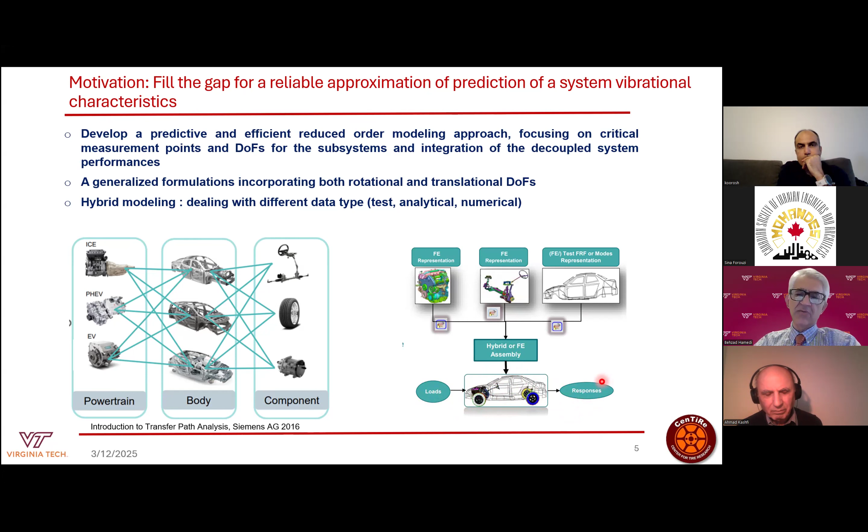Based on this linear approach, if we apply the load and know the receptance function for the system, we can find the response of the system using a simple linear equation: x equals h times f.

Another key application for this method is the receptance coupling method using frequency-based substructuring. That is a main focus for this research, the target cascading.

In the earliest stage of development, you can see this V profile, a common profile used in industry, mostly for the automotive industry. We start with the vehicle level, then go to subsystem decomposition at the subsystem level, do the design, and then integrate the subsystems.

In this early phase of development, you sometimes need to decompose a subsystem from the system, focus on just one subsystem, assign some targets for that subsystem, and check the performance in the design process.

Sometimes you need to combine some subsystems and integrate them to find the overall vehicle performance at the system level. So this technique is quite applicable for the target cascading process and is actually an effective approach in terms of cost and time.

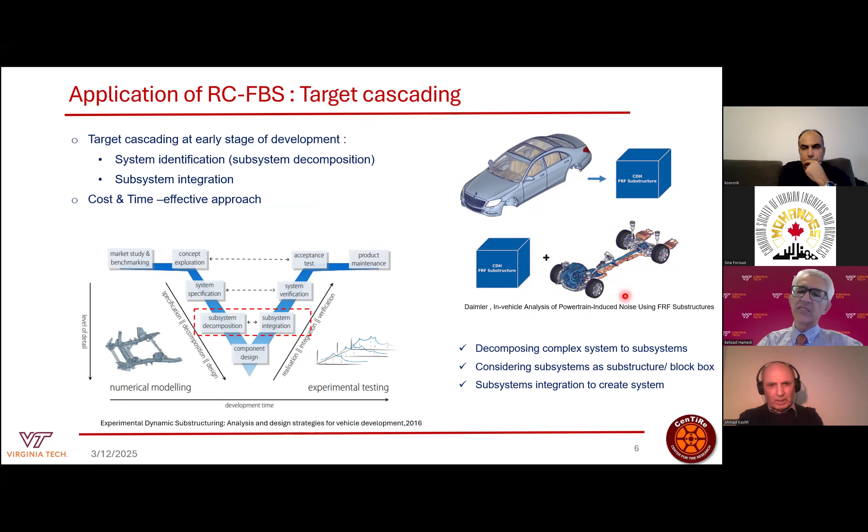We assume we can treat each as a black box, where the black box contains the DNA of the upper body, which is the receptance matrix, and similarly for the platform. We then integrate these two subsystems to find the overall vehicle response.

In structural dynamics and vibration analysis, complex systems can be analyzed by dividing them into subsystems, which we call substructures, because they are more manageable and easier to measure.

The dynamic substructuring technique breaks down into three main categories: the physical domain, the modal domain, and the frequency domain. The physical domain is based on the time domain, the modal domain is based on eigenvalue analysis, and the frequency domain, which is our focus, is based on the Fourier transform or FRF.

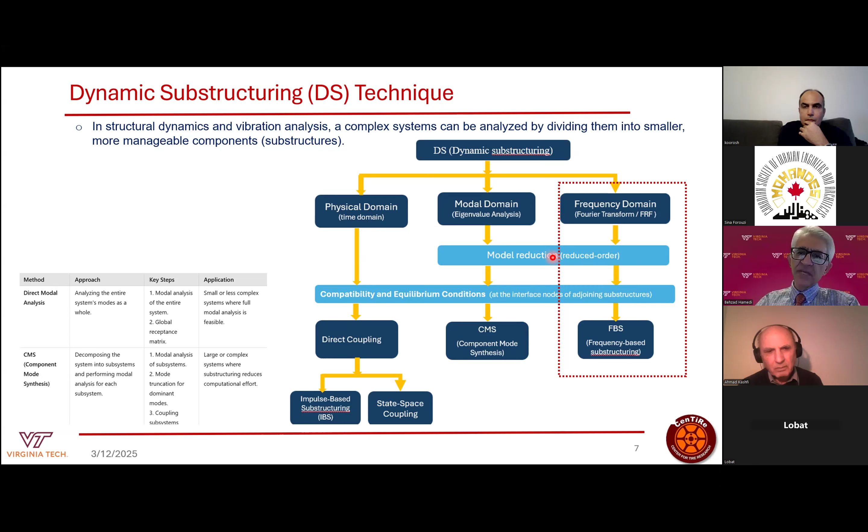We mostly focus on this part, the frequency-based substructuring method. So two of these methods are the modal and the frequency-based approaches. Both of these methods are model reduction techniques, based on model reduction.

It is a model reduction technique because it assumes that a system or substructure will be replaced by a limited number of mode shapes, which we call mode truncation.

Frequency-based substructuring, which is my focus here, actually replaces or represents subsystems by a number of points that carry the DNA of the subsystems—points of interest that can be internal or connection points between the substructures.

When we define the subsystems, we use the compatibility and equilibrium conditions at the interface points to find the governing equations for the whole system.

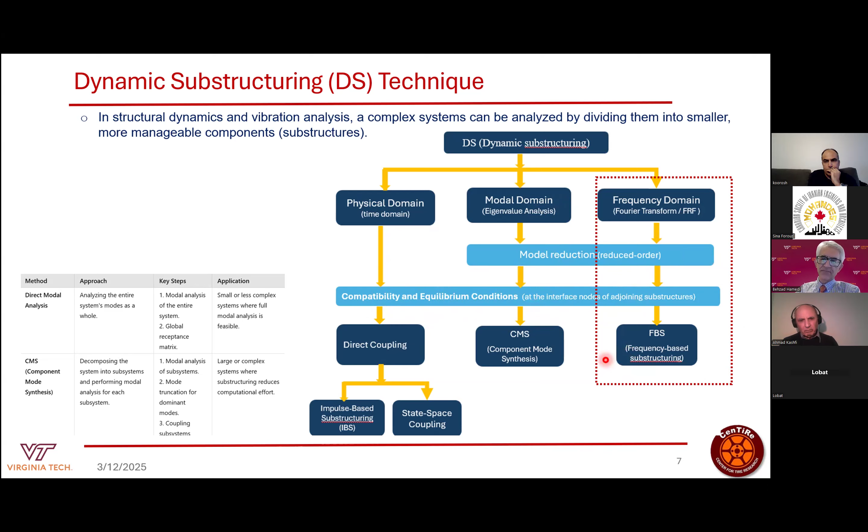In this matrix, I'm going to compare the modal technique and the frequency-based technique, both of which are used as approximation methods for predicting the system's vibrational performance and characteristics. The model reduction approach for the modal technique...

I also mentioned CMS, which is component mode synthesis, one of the main techniques for the modal approach used with substructures and subsystems, and it is actually based on mode truncation.

The frequency-based substructuring is actually based on condensing the system to a necessary or required frequency, FRFs, or the receptance function for the key interface and the internal points.

So our strategy here is replacing the subsystem by a number of limited points in the interior, as interior or as interface points.

Another assumption worth mentioning is that when we work with a model, we assume mode orthogonality in most cases. This mode orthogonality would be valid in the low and mid frequency range, when the damping effects is quite simple, and we can assume this is proportional damping or Rayleigh damping, or weak damping.

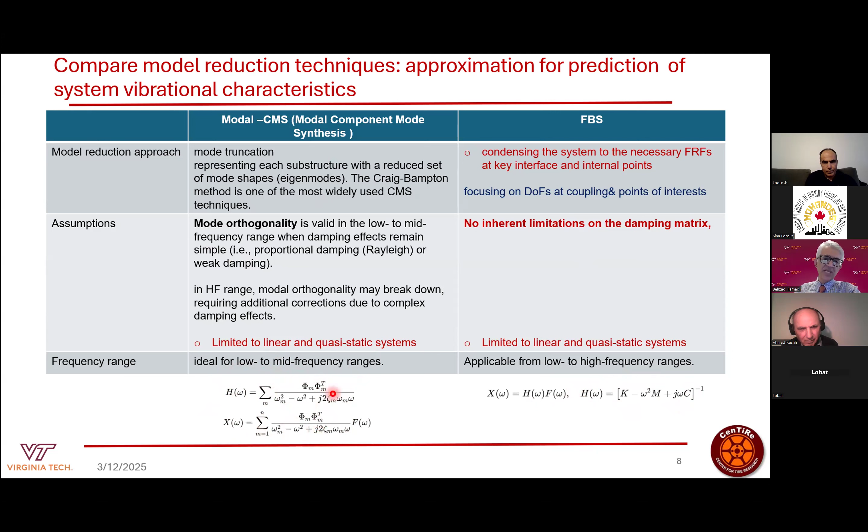In the modal technique, we calculate h from this equation, and this equation's assumption is based on the assumption of mode orthogonality. So the H, the receptance matrix, can be calculated from these equations, and we can talk about that later.

This slide shows the roadmap and flow chart of how we can determine the receptance of the assembly system or entire system based on the individual subsystems or substructures.

The first step is identifying the points of interest, which points are required to measure or focus on in the subsystems, and then define the partitioning strategy. How many subsystems you are going to focus on, two subsystems, or decompose the system to a higher level of subsystems. It actually depends on your availability for the subsystems, the information and data that you have.

The next point is focused on the concept of connection between the subsystems, because the subsystems are sometimes connected through single points, sometimes multi-points, and sometimes actual flexible points. So we have bushing, we have mounting in the connection points. We need to define which connections and how we can model this connection, by rigid assumption or with a flexible bush.

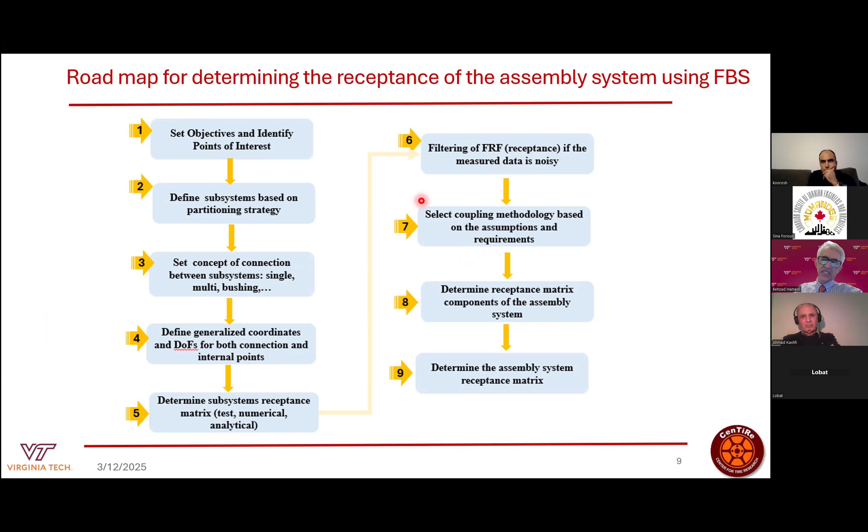And then finally, determining the receptance matrix and the component of the receptance matrix based on the algorithm governing the integration of the subsystems.

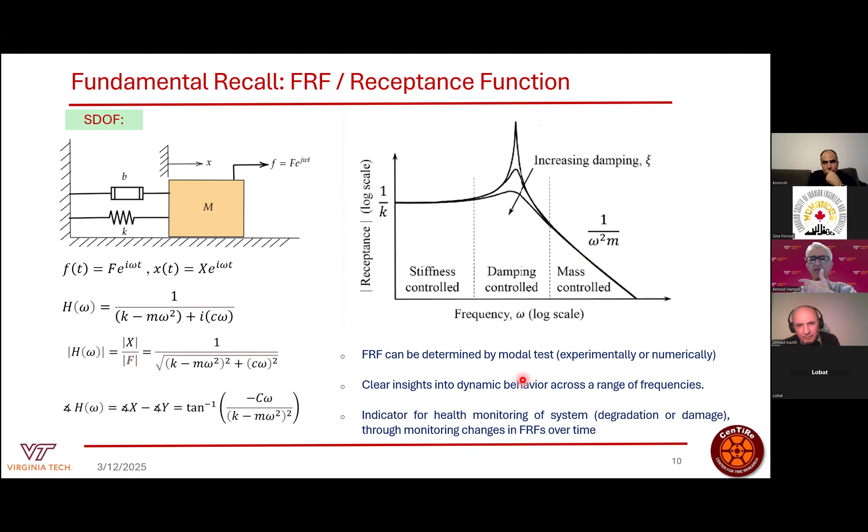A clear insight into the dynamic behavior across a range of frequencies for a system, used as an indicator for health monitoring of the system, to check that the system is under degradation or damage. And that's actually because it monitors the change in the FRF over time. So the change of the FRF over time is a good indicator to check that the system is healthy or not, for dynamic systems.

So this slide will illustrate how we can describe a 2 degree of freedom system based on the matrix of the receptance. If you have 2 points, X1 and X2, and we apply 2 excitations, F1 and F2, we can calculate X1 and X2 based on this matrix form. H11 means the component of the receptance obtained by exciting at point 1 with force F1 and measuring the displacement X1 at the same point. H12 means applying the force at point 2 and measuring the response at point X1.

In the case that we have the same number of excitations and measurements, F can be calculated from the inverse of H times X. But in some cases the number of excitations and measurements are not the same, so we can replace the inverse by the pseudo-inverse matrix. On the left side we have this equation for n degree of freedom systems, and we can write a similar equation for n degree of freedom systems.

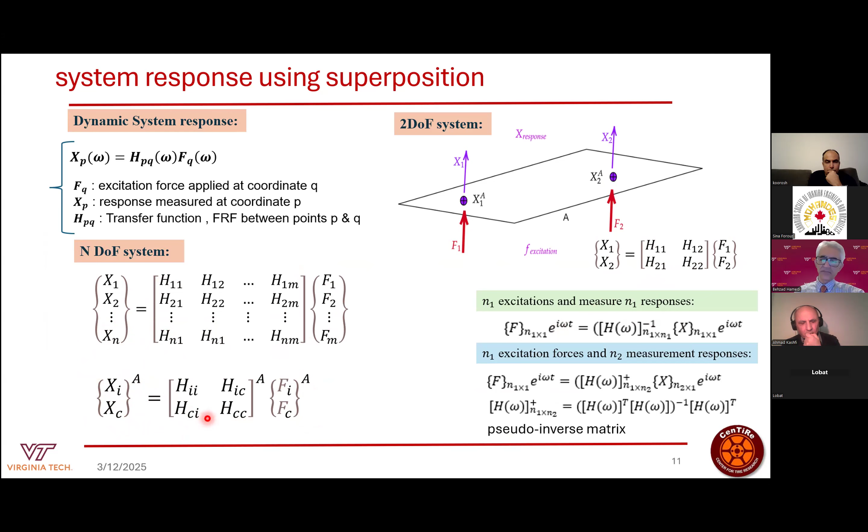As the simplest case, we start with a system AB that includes two subsystems, A and B. In general, each subsystem has its own internal degree of freedom that we want to measure or excite, and also the connection degree of freedom. In the decoupled condition, since we want to measure the subsystem individually, subsystem A's receptance matrix can be measured by test or numerical calculation. Similarly for B, if we have both the internal degree of freedom for A and the connection C for A, and B as the internal degree of freedom for B. The Z here is the dynamic stiffness, which is the inverse of the receptance matrix.

Let's consider this simple case where we only consider the connection degree of freedom, without any internal degree of freedom, focusing just on the connection points at the interface. In this condition, we ignore the internal degree of freedom for simplicity, and in the decoupled condition the governing equations for each subsystem would be like that. When we consider the boundary conditions as equilibrium and compatibility equations on these connection points, we can write the boundary condition equations like these.

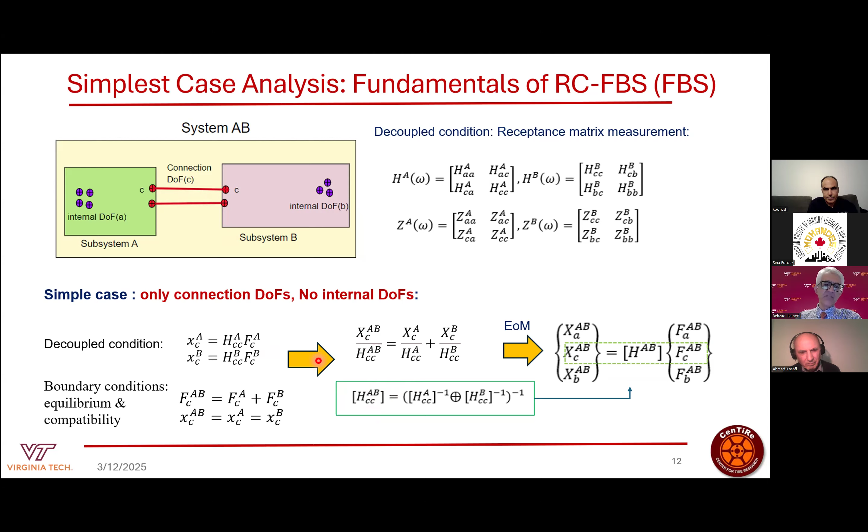So here the HCC can be a single data point or a matrix. If we have one connection, that will be only one single data point. But if we have multiple connections, like here, the HCC would be a matrix. So if you consider both internal and connection degrees of freedom, we have the AB system, still we have the two substructures assembled to create the AB system.

But consider more complex cases where we are interested also in points inside the substructures. Then this equation is not valid anymore, because this is only focused on the connection degree of freedom. We can prove that in this case we have a more complex form of equations that determine the receptance of the AB assembly based on the receptance components of the individual substructures. This methodology was first developed by Jetmundsen and published in 1988.

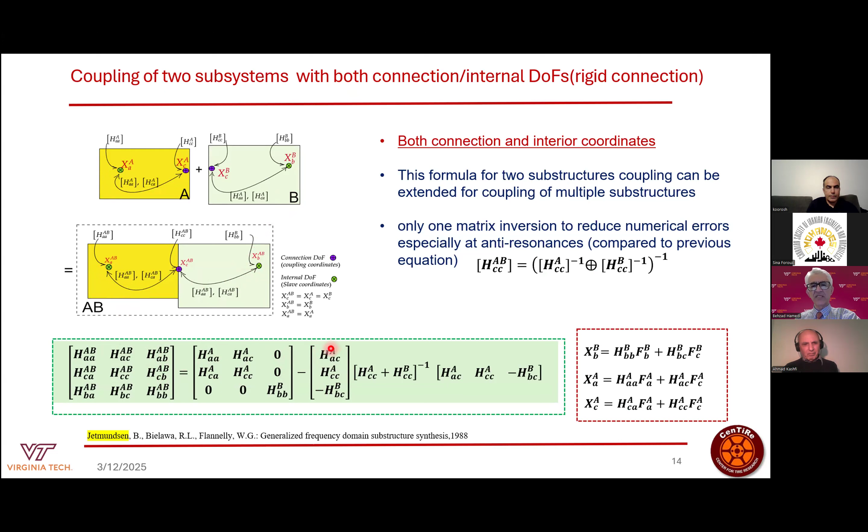So here I want to interpret the definition of the receptance component HAB physically. From this equation, let's extract HAB between points A and B. Point A here, and point B is an internal point located in substructure B. If we want to find this component from the other components, we set this to zero, and then manipulate this term and this term and this term. So we can reach this equation to find this component.

In this term, the middle term describes the receptance of the connection points. If there is no spring or flexible mounting at the connection points, this is the case.

And HAC is actually determined from individual measurement on substructure A, by excitation at point C and measuring at the internal point A, giving you HAC on substructure A. Similarly for HCB, B is the excitation point—we apply the force or excitation at point B and measure the response at the interior point. We apply the excitation force at the internal points of B and measure the displacement at the connection point. We can also prove that we have symmetry, so HCB is equal to HBC.

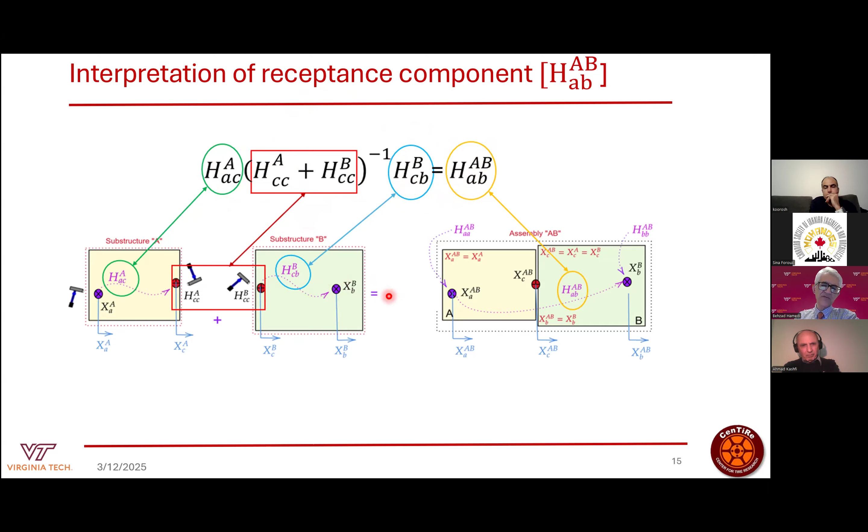In case we have flexible mounting at the connection points, the stiffness of this connection, or the flexibility, will appear here as the term K to the minus 1, K inverse, added to the receptance at these points, and this flexibility will be added.

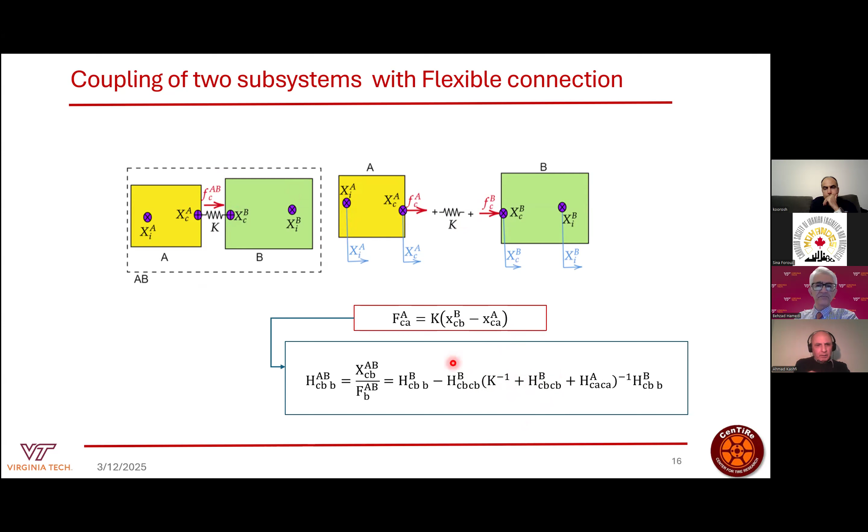As a simple case study, we consider a 2 degree of freedom dynamic system where both ends are fixed or constrained. In this case we can apply the substructuring method and decompose the system into two subsystems that are connected with a spring, so we have flexible connections.

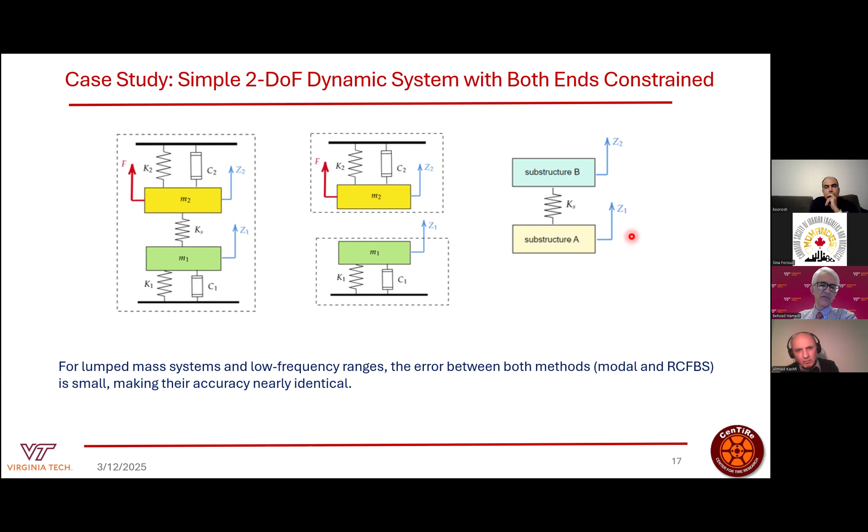For this simple case, based on lumped mass systems and with the assumption of low frequency range, there is a small error between the modal technique. If we solve this equation using modal analysis and frequency-based substructuring, meaning receptance coupling based on FBS, the error is quite small and we have good correlation—it's quite identical.

But we can show later that if the dynamic system is more complex, and the flexibility of the substructure is involved, this deviation or gap will be higher.

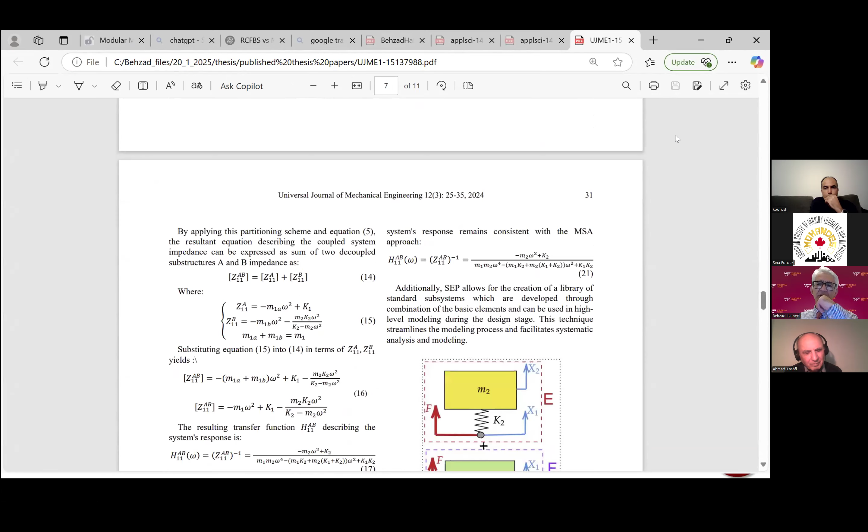I published these results and my research in these papers, and you can go for more details about what I discuss and the application in the automotive industry. The paper includes much more detail than what I just showed in one slide.

Another application for this methodology would be tire characterization using coupling and decoupling techniques based on this method. For instance, you want to calculate or measure the full vehicle receptance matrix, and based on that measure the response. You can do it based on the measurement of substructure A, the vehicle without tires, and substructure B, the tire itself. So we can focus on measuring the subsystems individually.

We can measure the tire because it's easier. We can measure the upper body, or have the data of the upper body without tires, and then use the receptance coupling technique, using this equation to find the coupled system receptance matrix based on the individual subsystems' receptance matrix.

And sometimes you're interested in measuring just one of the subsystems. For example, you have modal data from modal analysis performed on the full vehicle, so you have the receptance matrix. You also have the receptance matrix of the car without tires, and by this decoupling technique, B can be derived from the coupling of AB and minus A, because AB minus A gives the B properties.

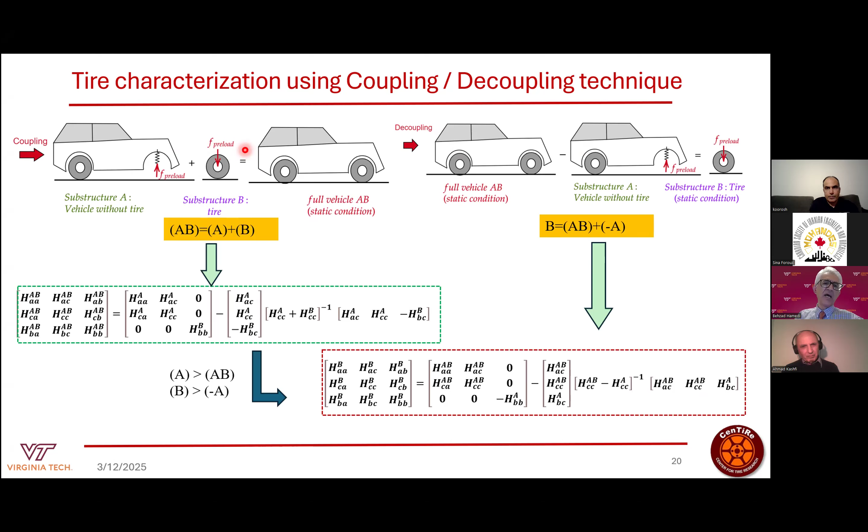This is more detail on what I mentioned, which steps we should take to apply the preload. For instance, we should consider dummy springs at the attachment points, apply forces, compress the springs, and use a belting mechanism to hold the body and the tires at the correct heights and correct preload conditions, and then measure the receptance matrix.

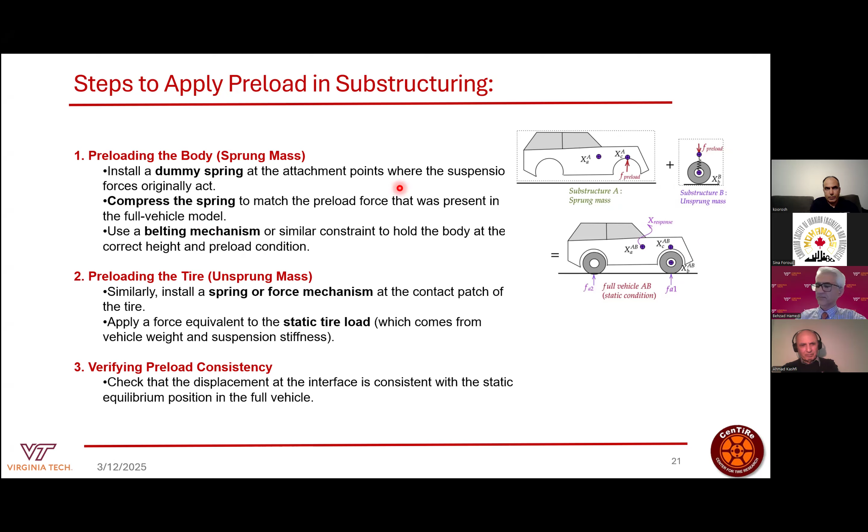Okay, so this is the slide describing the GRC-FBS method. This is the first generalized receptance coupling technique using the frequency-based substructuring that we call the Jetmundsen algorithm. Jetmundsen started with integration of the two substructures, and then extended this equation to cover multiple substructures.

So if we have an n number of substructures, the equation will be changed to this general form. In this equation, the H couple is the H of the assembly. The M matrix is introduced here as a Boolean mapping matrix, which connects the interface and the subsystems together, because when we have multiple substructures, we have multiple connection points.

So we need to define a Boolean, or a mapping matrix, that connects the interface and the subsystems together. So for deriving this equation, the graph theory was used.

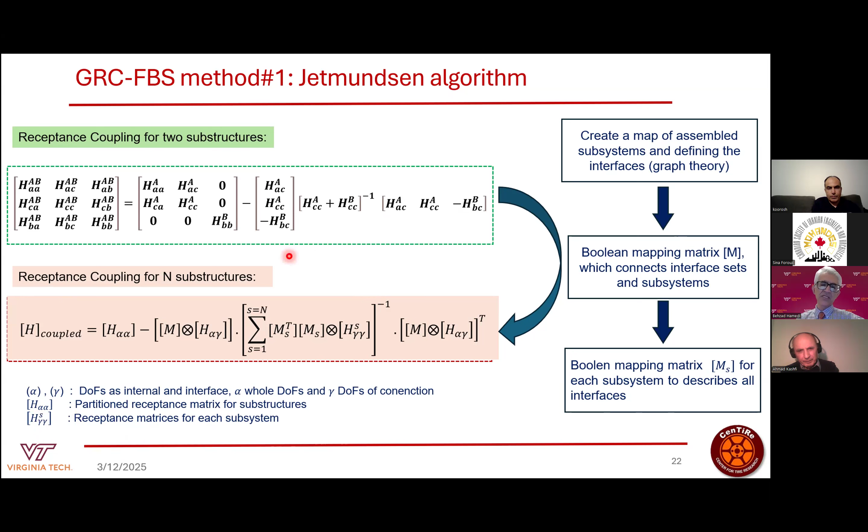So the second approach, the second methodology used as a generalized receptance coupling, is the LMFBS, that is based on the Lagrange multipliers approach.

I won't go into the detail of deriving the equations, but in this method we defined Lagrange multipliers to determine the internal forces at the connection points.

Based on applying the compatibility equations on the interfaces and defining the internal forces in the connection as a function of the Lagrange multipliers, and then inserting or plugging them into the equations of motion, we can reach this equation that gives you the H of the assembled or coupled system.

The H is in the condition of the disassembled or decoupled system, but this H covers all subsystems, and the B is the Boolean matrix that is derived from these compatibility equations. For these cases, there is a relation between the degree of freedom at the connections, so the B matrix can be calculated from the interface or connection between the degrees of freedom at the interfaces.

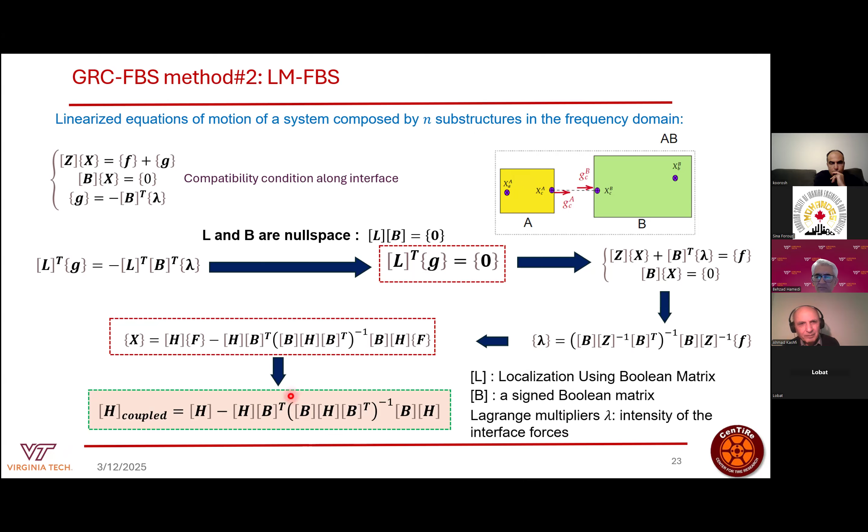So the next example is applying the reduced order model technique for electric motor noise study. If this is the Tesla Model S chassis, we can use this methodology to derive a reduced order model.

If we have an electric motor, we have the electric motor receptance matrix by testing, and then we have the mounting, the main mounting data, or the stiffness and the subframe data by test or FEA, and also this is the trim body. Actually the trim body is not here, but we assume the struts or dampers are connected to the trim body.

So we can define three substructures to represent the electric chassis system, substructures A, B, and C. This is the coupling graph between A, B, and C. A is the electric motor, and we consider internal degrees of freedom for the interior points, as well as the connection points for substructure A.

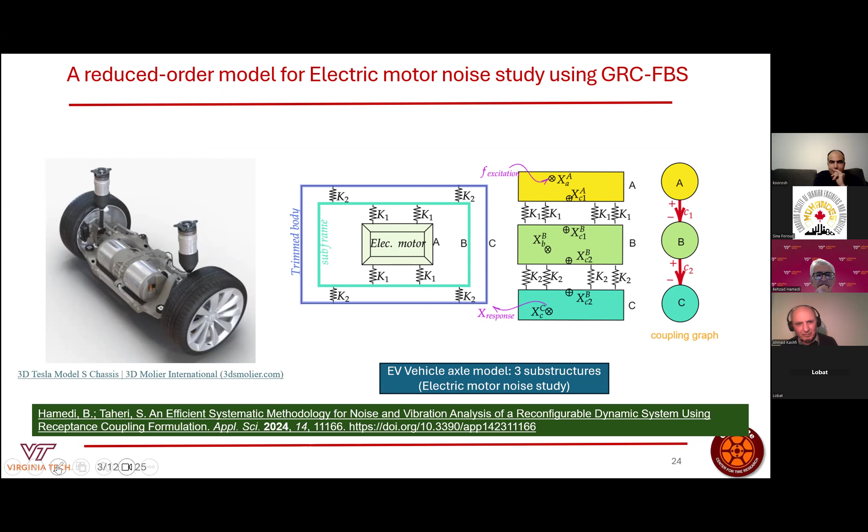In this paper, if you are interested, you can reach this equation - this is the very general formulation for this type of example. The alpha is the degree of freedom at the points of interest and connection points. We have two connection points, C1 and C2.

H alpha is the receptance matrix before coupling - it covers the three subsystems' receptance. You can see here, before coupling, H alpha is the receptance before coupling, and H alpha gamma is the receptance between alpha and gamma, where gamma is the connection points.

The M is the Boolean matrix that can be calculated based on the graph theory or graph schematic that describes the connection points and how the connection interfaces are between the interface and the substructures. Also, MA, MB and MC are for each substructure, derived from this matrix M. The first row is for A, second row for the B substructure, and third row is for the C substructure.

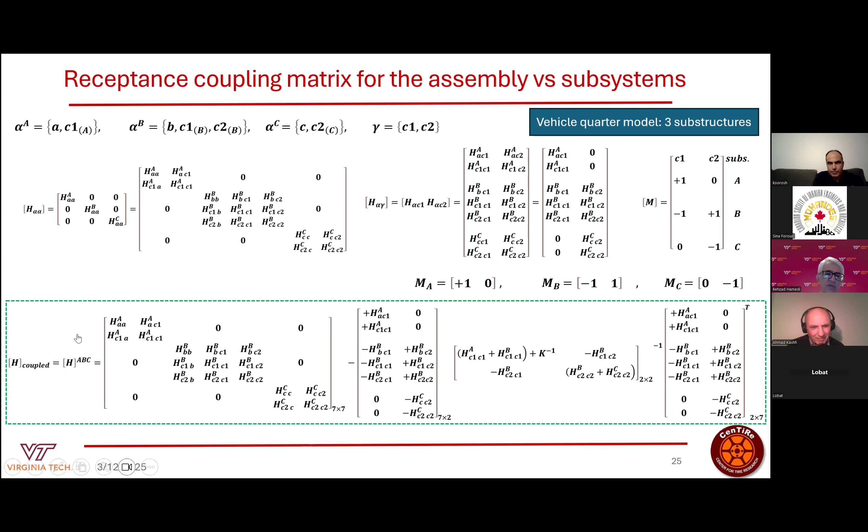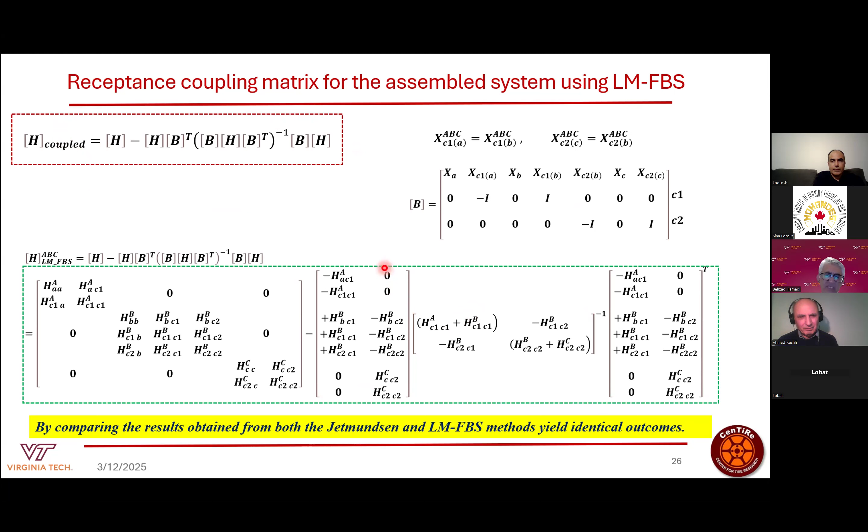Then we can couple them, and use this generalized formulation to derive the coupled receptance of the whole system. In this slide, I just use the second method - the Lagrange multipliers method using FBS, frequency-based substructuring. This also gives the same results if we use this methodology, so we can reach a similar response for the H matrix for the whole system.

Now I want to talk about extending generalized explicit terms. In my research, I was working to develop a more generalized form of the equations, integrating both translational and rotational degrees of freedom in a more explicit form, which would be quite effective for capturing the dynamics of flexible structures under complex loading situations.

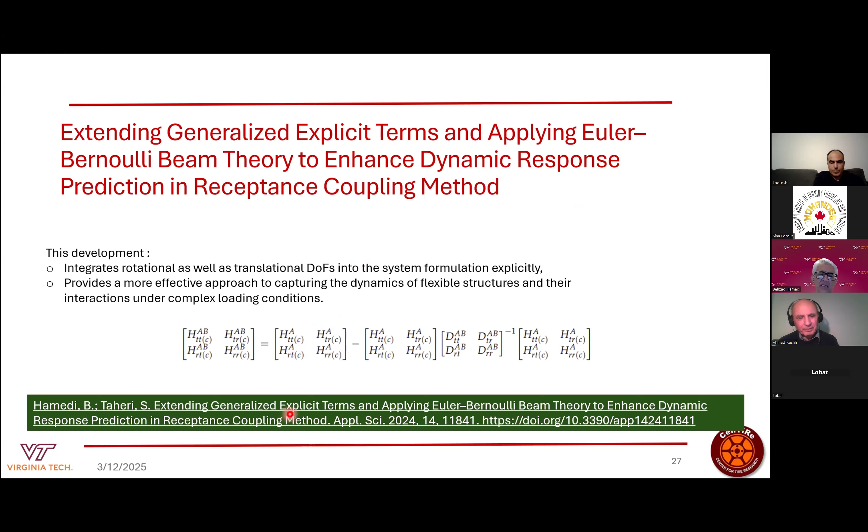I also used this for determining the receptance matrix for flexible bodies. I used the Euler-Bernoulli beam theory to determine the...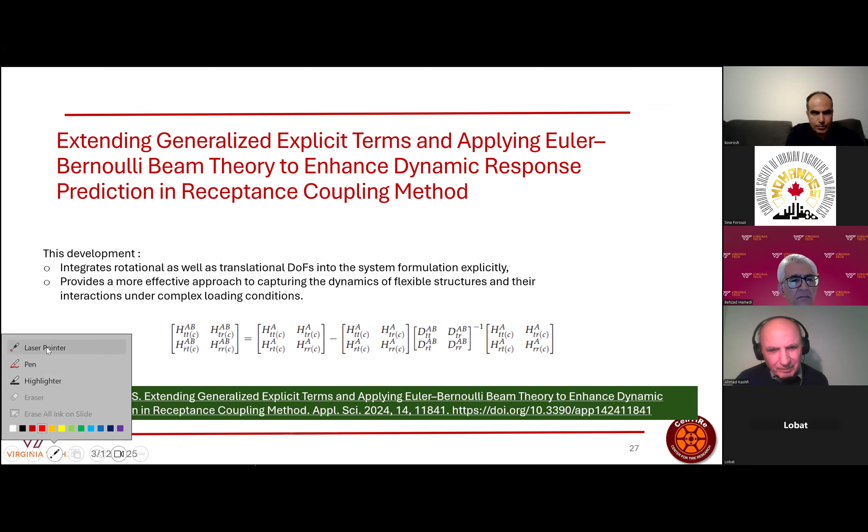This is the paper I published that includes all the details of how I developed these explicit terms, a more generalized form of the equations that govern this type of - in general, a generalized form of the receptance matrix. This is the detail of the equations I derived for this more general case.

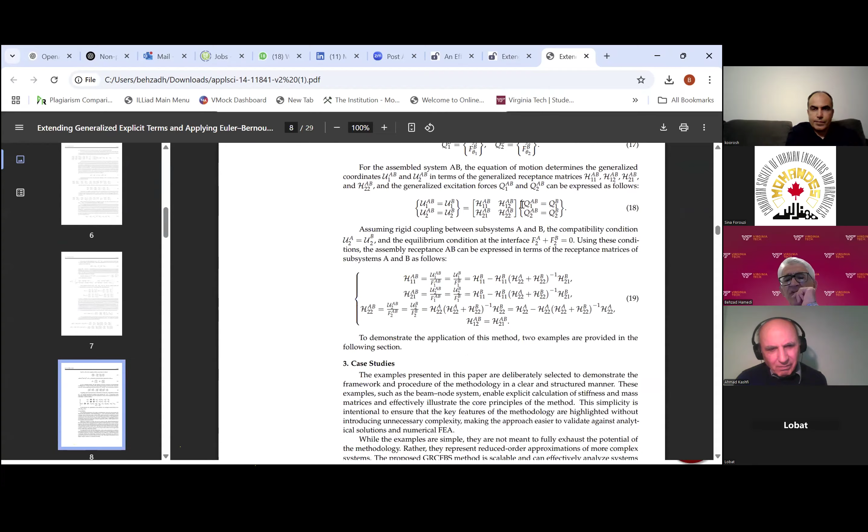This is the example or case study I used. As one case study, I just applied my methodology, considering simple cases based on two beam elements or two flexible bodies with beam elements. We have both rotation and translational degrees of freedom, and one of them is a cantilever beam, the other is a free beam.

We can calculate each substructure individually using the analytical equation based on Euler-Bernoulli theory - that was the reason I used the simpler case, so we can substitute each one as a substructure. This is substructure A, this is substructure B.

We have this connection with 2 degrees of freedom, both translational and rotational. When we find the assembled receptance matrix in different cases, this is a graph comparing the 3 graphs H11, H12, H22, based on different excitations. For example, H11 - you apply a force at point A, in the y1 direction, a simple force, and measure the y1 response, which gives you H11. H12 can be calculated by applying a moment or torque at this degree of freedom.

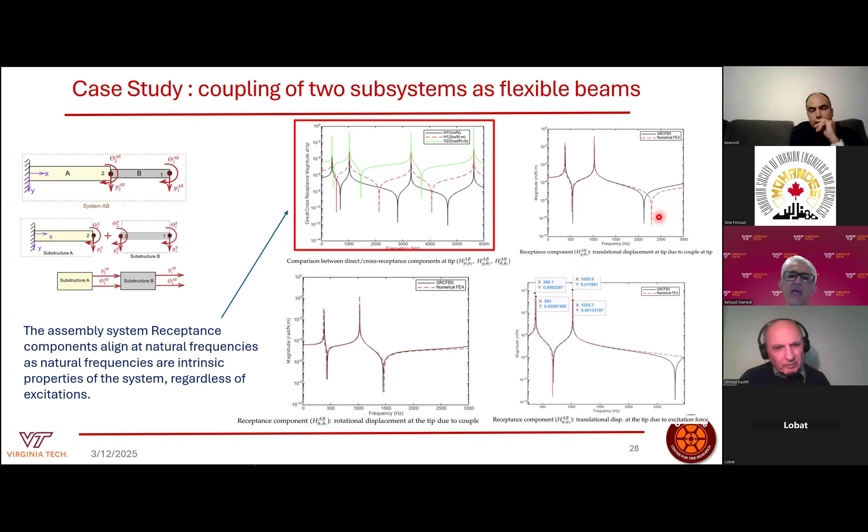And also for y1 y1, we apply the force at the tip and measure the displacement, and we reach good correlations. For the cross receptance components, we have a shift at higher frequency, a gap, which we can discuss later.

Another case study: we consider a flexible body with a rigid body, a rigid wheel. I wanted to know the dynamics of this system. In this case, we had a similar phenomenon - the natural frequencies are independent of the excitations. So we have H11, H12, H22. If we calculate at the system level, we reach the same peak and the same natural frequency, which of course we expected.

But when we compare, for example, H theta 2 on the assembly - this is the component of the receptance matrix in the assembly - comparing the magnitude between the two methodologies, GRC-FBS and numerical FEA, we have good correlation up to 2000 Hertz. But beyond that, we have a gap - a shift of the frequency, the peak of the natural frequency.

The trend is similar, but for another component, H Y2 Y2, we also have this shift at higher frequency beyond 2000 Hertz. So there is good agreement between the two methods in the first dominant mode, but beyond 2000 Hertz the rigid component's influence increases, affecting the accuracy.

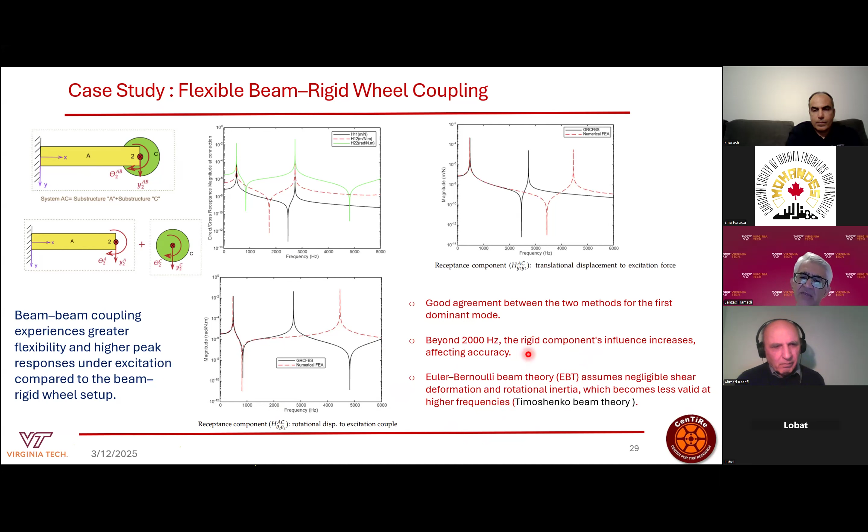We assume one source of this gap depends on our assumption. We use the Euler-Bernoulli beam theory, which assumes negligible shear deformation and ignores rotational inertia. This theory is less valid at higher frequencies, and if we want to be more accurate and include the effects of rotational inertia and shear deformation, we need to use the Timoshenko beam theory.

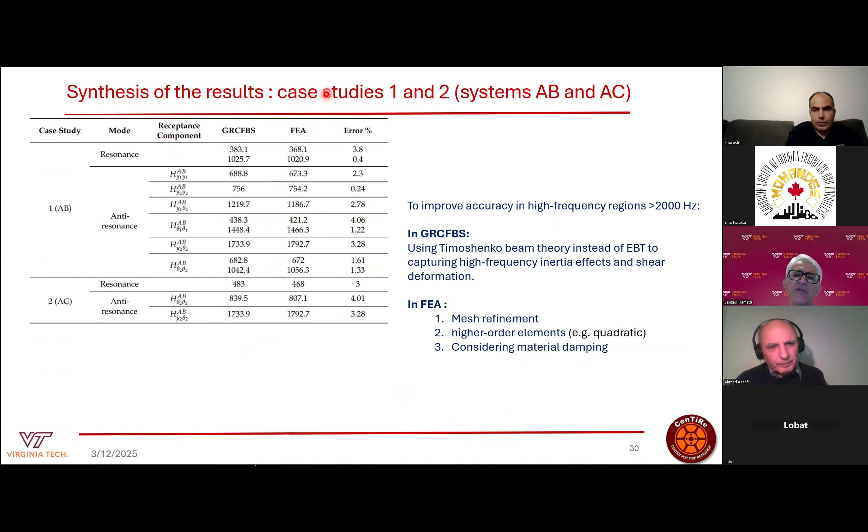Anyhow, in the case where I used the Euler beam theory and a simplified finite element modeling technique, we could reach a good correlation with an error of around 4%.

And if you want to improve that, it's possible. In the FEA, I can use more refined mesh, mesh refinement. We can apply higher order elements, quadratic instead of linear, and also consider material damping. I can also reach good correlation by using the Timoshenko beam theory instead of the Euler beam theory, to better capture high frequency inertia effects and shear deformations.

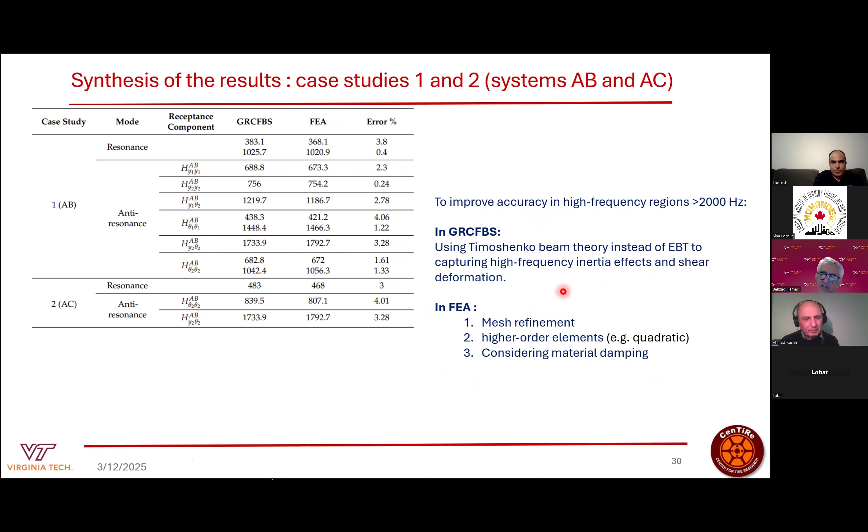This is another case study - the first time this technique was applied to derive the dynamics of the whole vehicle using the generalized receptance coupling FBS, the frequency-based substructuring technique. This is used for tire characteristics. Sometimes a supplier wants to evaluate different types of tires on vehicle vibrations, so in that case you have these substructures.

You can measure the substructure receptances, the body structures below the tires, and then integrate the different tire receptances to find the overall receptance matrix. The detail of that is actually represented in this paper.

So in this paper, this is the detail of how we can develop this theoretical framework and methodology for prediction of the tire characteristics. If you are interested, you can go to this paper and study it - it's actually published in the Journal of Vibration Engineering and Technology this year.

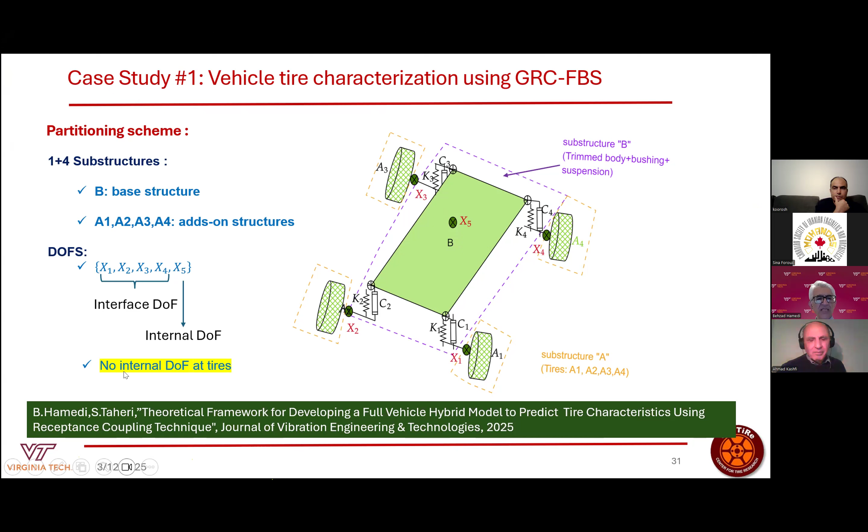So the degree of freedom: we have interface degree of freedom and also internal degree of freedom. X1, X2, X3 are the interface degrees of freedom that we call C. I also consider internal degree of freedom not on the tire, just on the body structure, as X5, because you are interested to measure the vibration at one point on the body structure, for example to record the noise on a microphone installed at that point. I assume there is no internal degree of freedom on the tire.

This is actually the coupling that I used for this problem. I use a multi-step scheme. In the first step, I assembled the governing equation for two substructures. I started to assemble A1, the first tire, the front left-hand tire, and assembled it with the body structure.

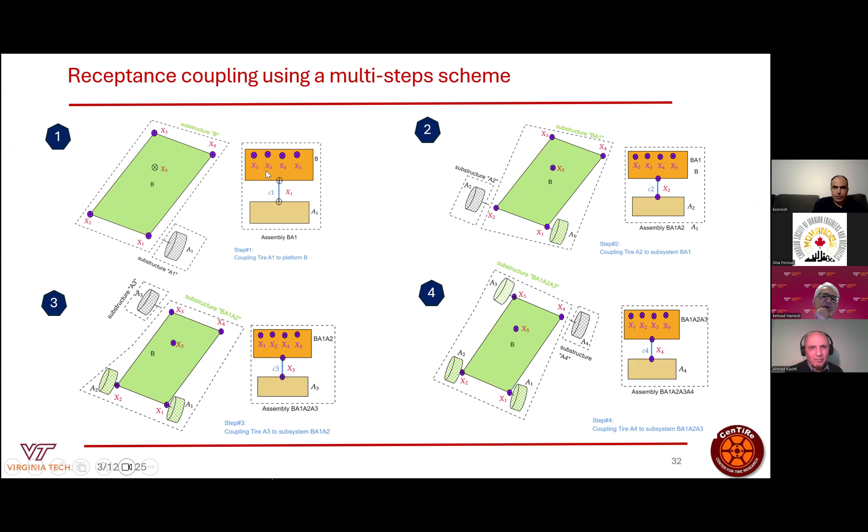This is the scheme of the substructures. Substructure B includes five degrees of freedom, or five general coordinates. We have x1, x2, x3, x4 as the connection degrees of freedom, and x5 is the interior degree of freedom.

When we assemble these two substructures, we can then consider them as one substructure and assemble it to the second tire. The third step is considering the previous step as one substructure and assembling it to tire A3. Then as a last step, we assemble substructure A4 to substructure B, A1, A2, A3.

So this is the process for deriving the equations. The beauty of this method is that the number of measurements needed to develop the full vehicle vibrational model is dramatically decreased. This is one of the beauties of this method.

For this case, we just need to measure only 5 elements on the disassembled substructures. For the body structure, we need to measure H11B, H21B, H31, H41, H51. We need to excite interface point 1, x1, and then measure the displacement at x1, x2, x3, x4 to calculate these receptance components for the body substructure.

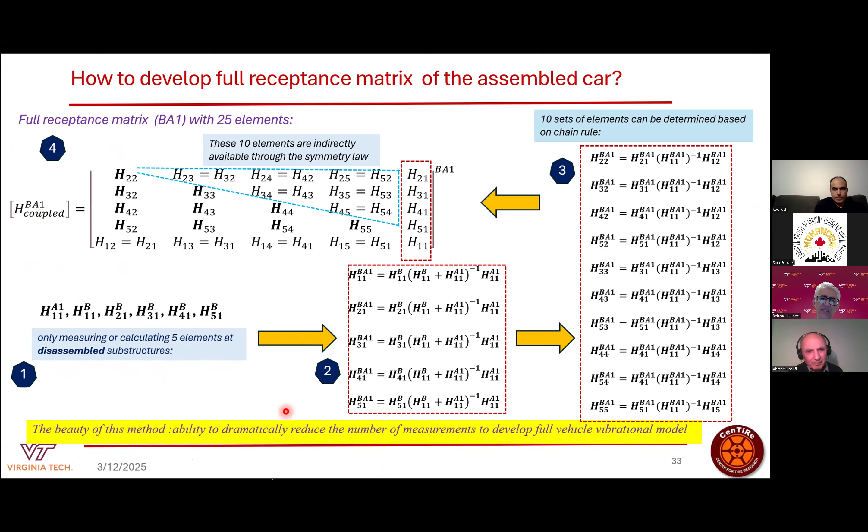So by measuring just 5 elements, you can determine the BA1 receptance matrix for the coupling of substructures B and A1, the first two substructures. Then we continue a similar approach for assembling BA1 with A2, then BA1A2 with A3, and so on to complete the full assembly of receptances for the car, starting from just 5 measurements. By just 5 measurements of receptance elements in the disassembled, dismounted condition, you are able to obtain the receptances of the whole vehicle using this approach.

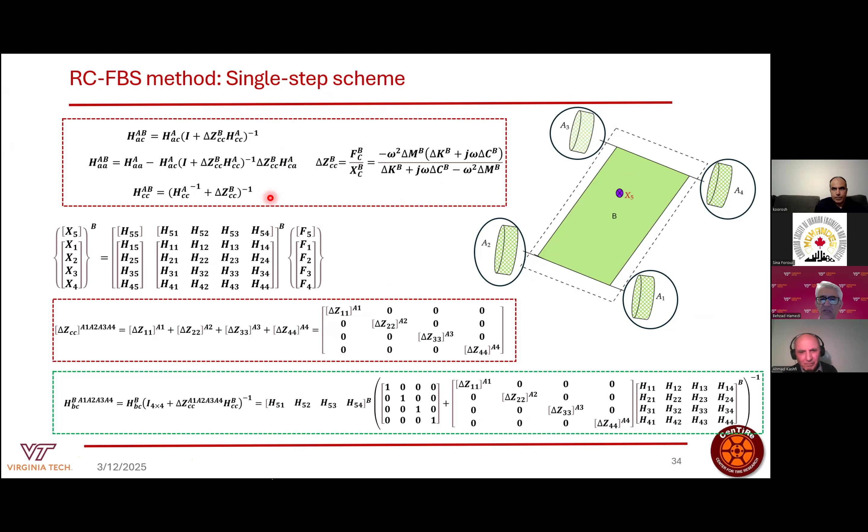So this is another concept or procedure - there is a possibility to assemble in one step, instead of multiple steps, the 4 tires to the body structure. So this is another scheme for the integrations.

I will not go through that because it takes a lot of time to discuss. But this is a similar case, with the only difference being that we consider the interior degree of freedom for tires. So we just consider A1, A2, A3, A4 as interior degree of freedom, or interior points on the tires. So each tire has 2 points of interest.

One is the connection, and the other is the internal point, because you need to measure something on the tires. You want to excite these points on the tire, the center of the points in the tire. So you need to assign this point - you need to consider this additional external point as interior.

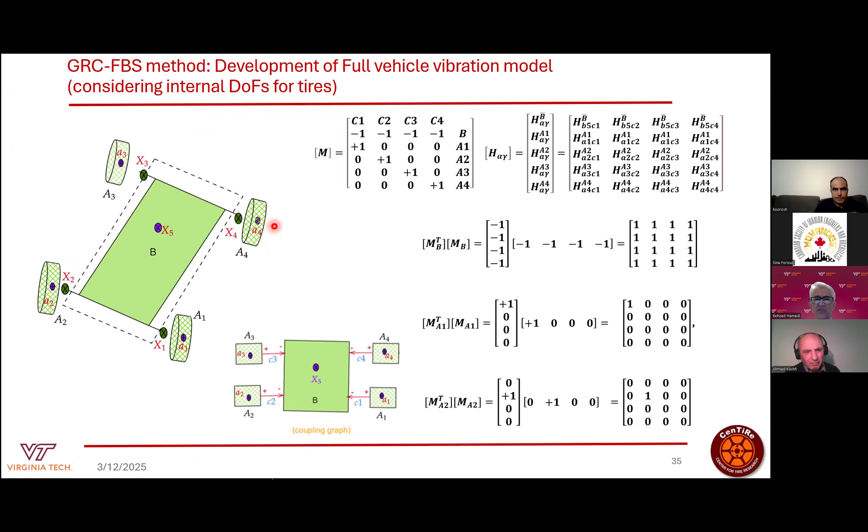So for this case I can use the general formulation, the GRC FBS, which is a more general case. We use the Boolean matrix. We develop the Boolean matrix - this actually gives you the relationship between the different substructures, because we have B, A1, A2, A3, A4 substructures, and shows how these substructures are coupled, having an interface or working together or in contact with each other through the interface.

So C1, C2, C3, C4 are the 4 connection areas. The M matrix components are -1, +1, and 0. It depends on the direction that you consider for the coupling, the connection - I mean the direction for the vibration. For example, here the vibration comes from the tires to the body structure, which is why we consider the direction for that.

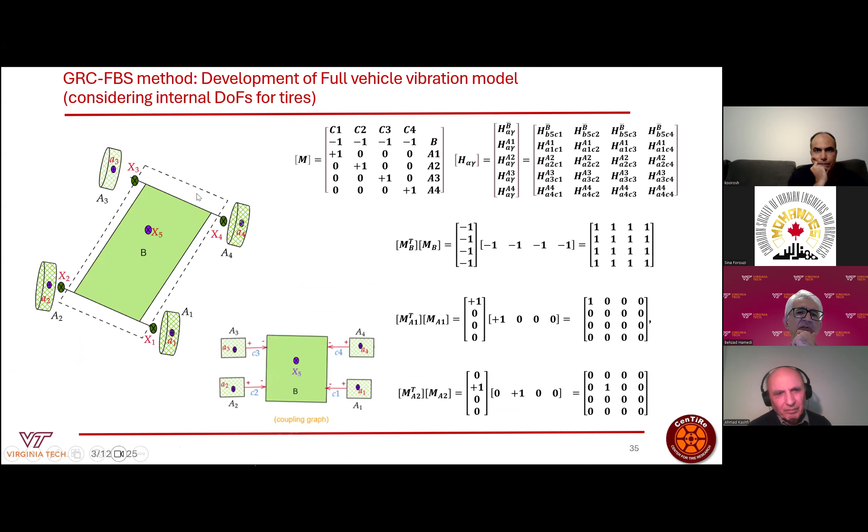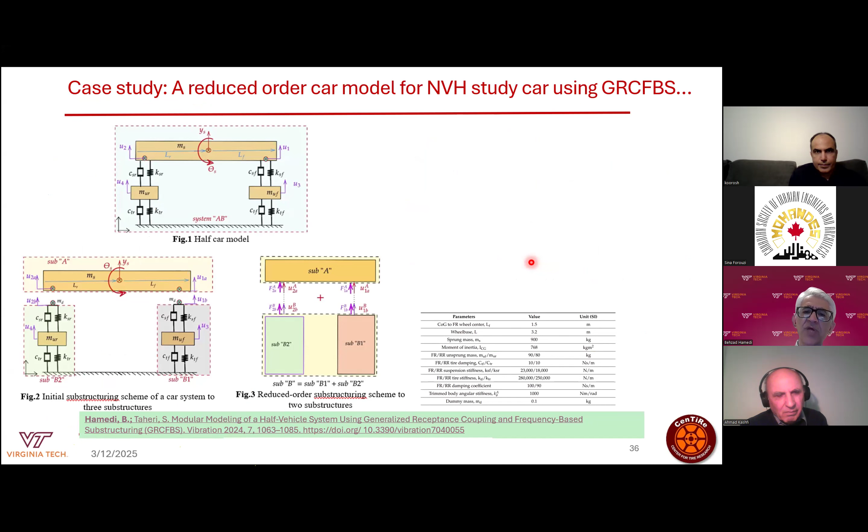So I consider the substructuring or coupling between two substructures. One is B, which covers substructure B1 and B2, and the other is substructure A. So this is the coupling of the two substructures.

So if we derive and plot the results and compare the different methodologies: the exact solution, the modal method, and frequency-based substructuring. I also considered FBS, LMFBS, and Jetmundsen FBS, because I wanted to compare two different algorithms that we talked about. We have two different algorithms for reduced order model development based on frequency-based substructuring, so I wanted to compare these two methods.

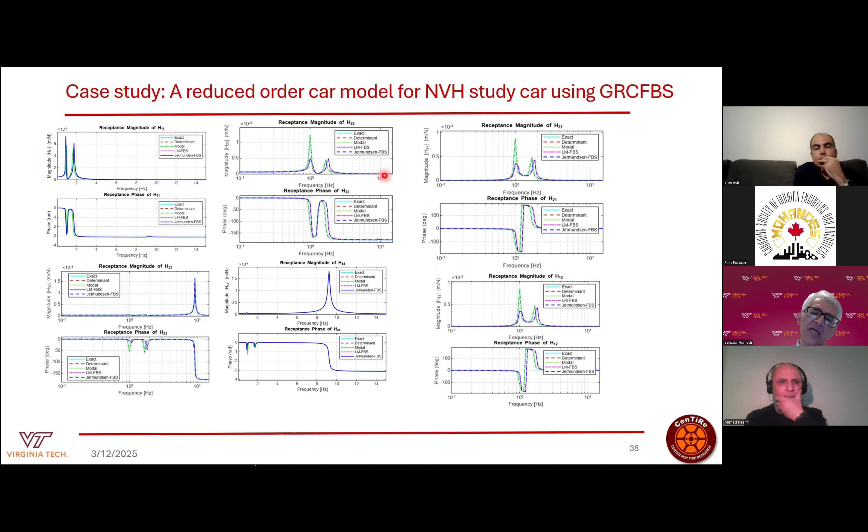So these are some components of the receptance matrix for the assembled system, in terms of the individual receptance components of the substructures.

So as a general synthesis for analyzing the dynamic behavior of this problem, the half car model, we reach a good correlation in the resonance frequency. We more or less reach similar values for the natural frequency, and we could obtain the dynamic peak in the magnitude, the resonance points, and also anti-resonance.

Because both behaviors are actually important: the anti-resonance points and also the resonance points. And also in the phase plot we could capture good correlation in the behavior. We could see the phase transition to -180 degrees near resonance, and also near anti-resonance we could see the phase shift back to zero. So this is what we expected.

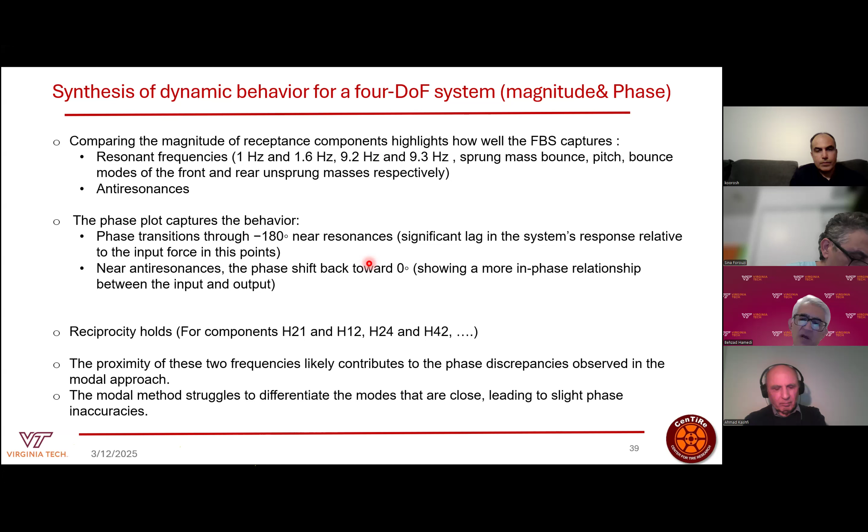So I come to this conclusion, also discussed in the paper I referred to, that the modal method struggles with differentiating modes that are very close, and that leads to a slight phase inaccuracy in the results.

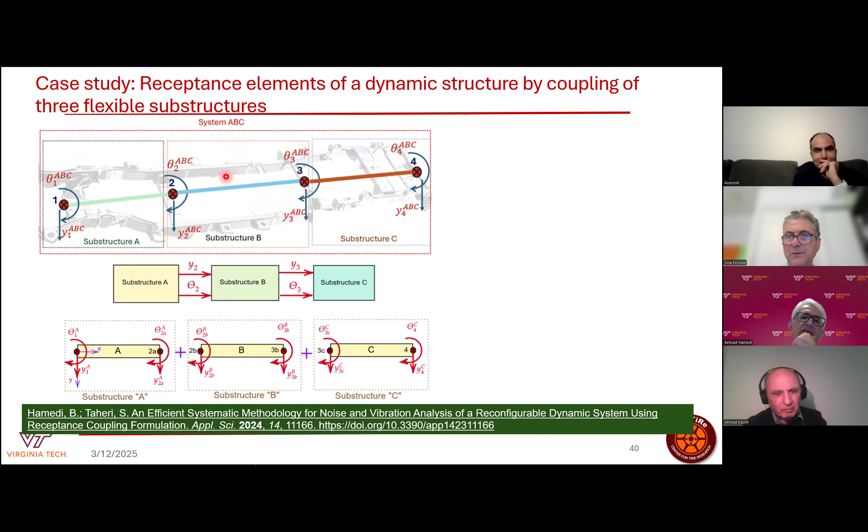Another case study for dynamic structures: we can decompose a system ABC into three subsystems, A, B and C. One example would be the underframe or underbody structure of a vehicle. We can consider reduced order models for these underbody structures, encompassing the three substructures, with translational and rotational degrees of freedom on the substructures.

So we can consider this scheme of the substructures. At the connection points we have both translation and rotation. This is another description for the substructure scheme - we have three subsystems. I consider three beam elements for each subsystem, applying Euler-Bernoulli theory to find the receptance functions in analytical form, since we didn't measure experimentally.

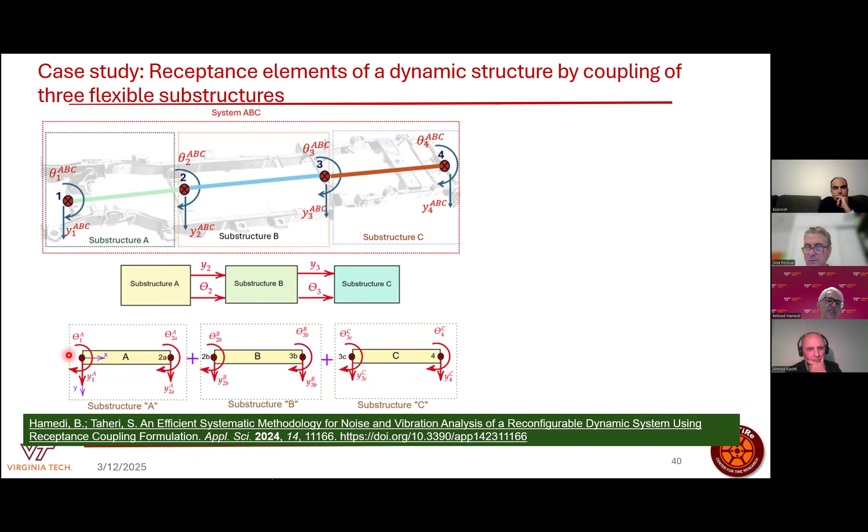When we compare the results, we came to good correlations between the methodology - between the model, GRC-FBS, and the numerical finite element method. One verification of the results: we could compare the receptance components, magnitude versus frequency, under different excitations.

But under different excitation, we could reach the same behavior. Of course the magnitude and the graphs would be different, but the peaks of the graphs would be similar. That's what we expected from the physics of the problem, since natural frequencies are independent of the excitation.

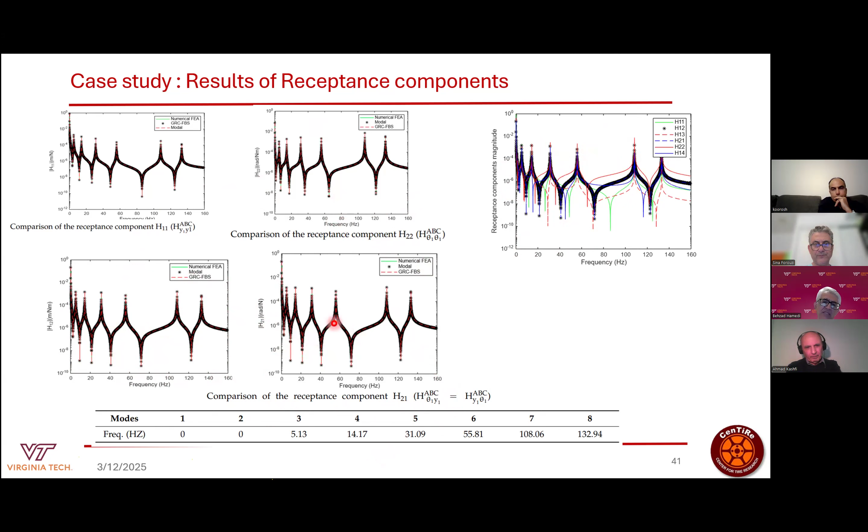So that verified the results. There's also good correlation between the receptance components. We also compared H21 and H12 to see that the results are quite the same, and we can see that the symmetric law is held - that's one of the things we use for validation and verification of the results.

As a summary, the major contribution of this research is for general reconfigurable dynamic systems that we can use in diverse fields like robotics, aerospace, and manufacturing. We develop a generalized methodology for coupling multiple subsystems with different kinds of interfaces in complex dynamic system domains.

This methodology can enhance our understanding of how vibration and mobility transfer through the subsystems and interfaces, and it would be an effective methodology for capturing the dynamics of unknown subsystems within complex dynamic systems.

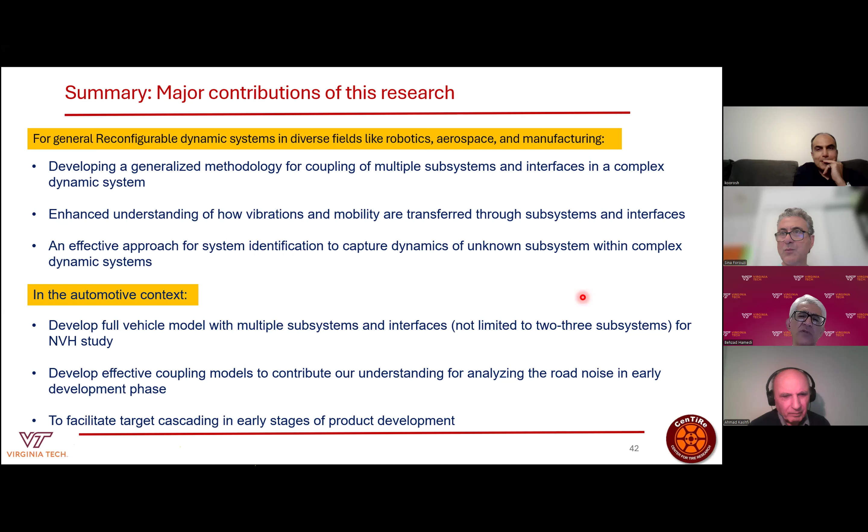In an automotive context, we can develop a full vehicle model with multiple subsystems, not limited to 2 or 3. In general, if you're interested in considering subsystems like the powertrain or suspension individually, or want to focus in more detail on multiple substructures with different interfaces, you can use this technique to develop effective coupling methods for analyzing road noise in early development.

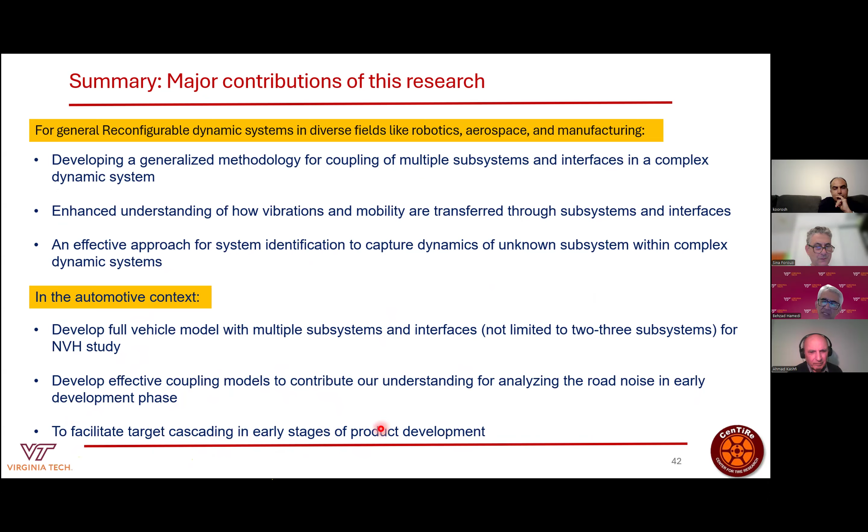One application is for road noise analysis and tire characterization. We can also use this methodology for target cascading in the early stage of product development, as was discussed. So future work involves some areas we can work on, such as modeling of joints considering preload.

We need to develop methodology to account for preload effects, capturing their influence on system dynamics and stability, and apply the approach for developing reduced order models for nonlinear dynamic systems. What we discussed is based on linear dynamic systems, but these are new areas we can focus on.

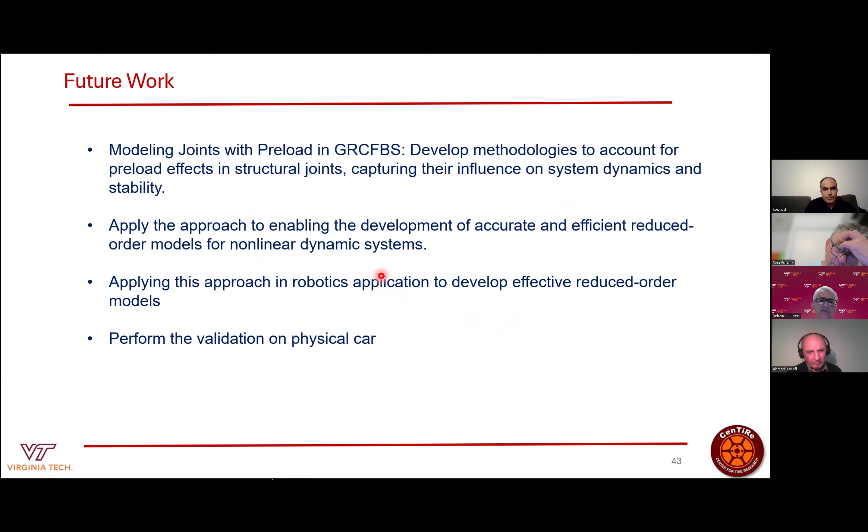We can apply this approach for robotic applications to find effective reduced order models, and also perform validation on physical cars - that's what we can do as future work.